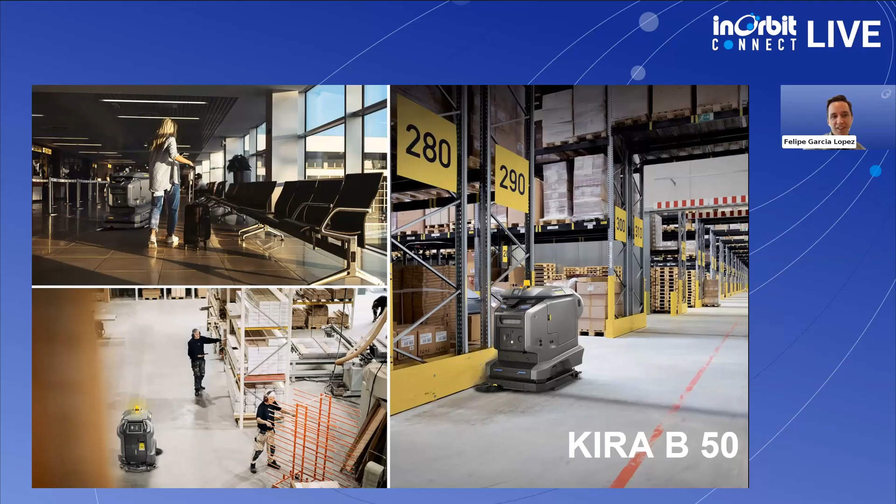To give you a bit of an idea, I hope you can all see the video, so you can see the robot a bit in action.

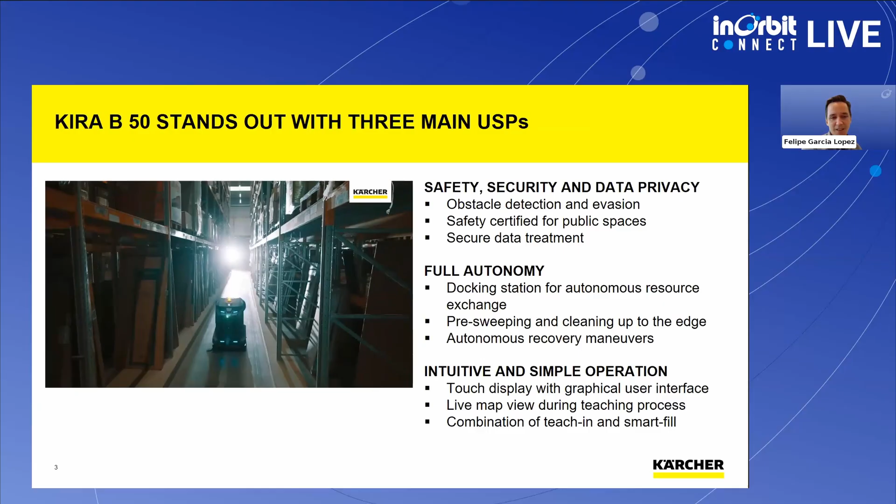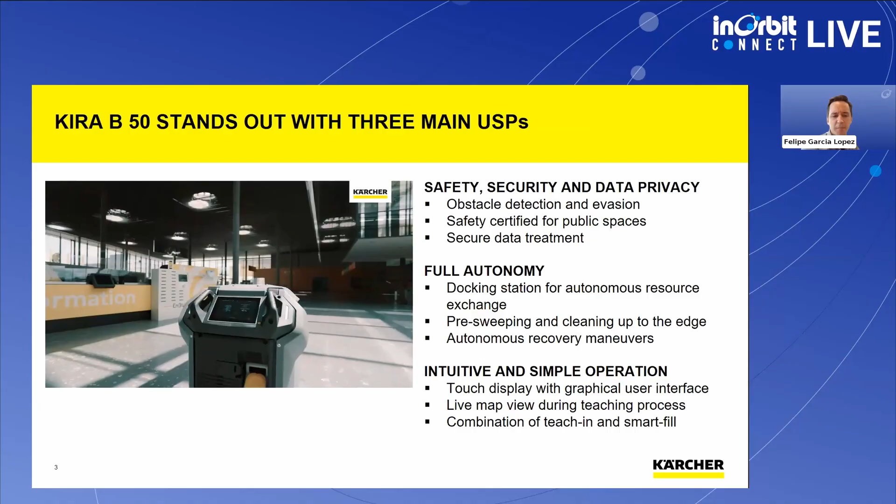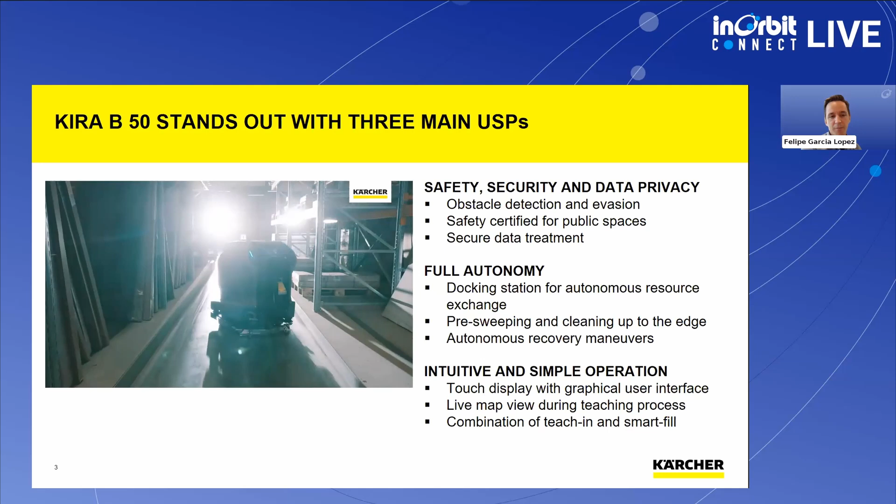The main USPs for this product are that we take a lot of effort having it certified in terms of functional safety and data security and data privacy, because that robot, like most robots, has a lot of sensors. I will show you a bit more details about the sensor setup of that robot later. But for our customers, it's important that the data is secure, that we take care of the environments.

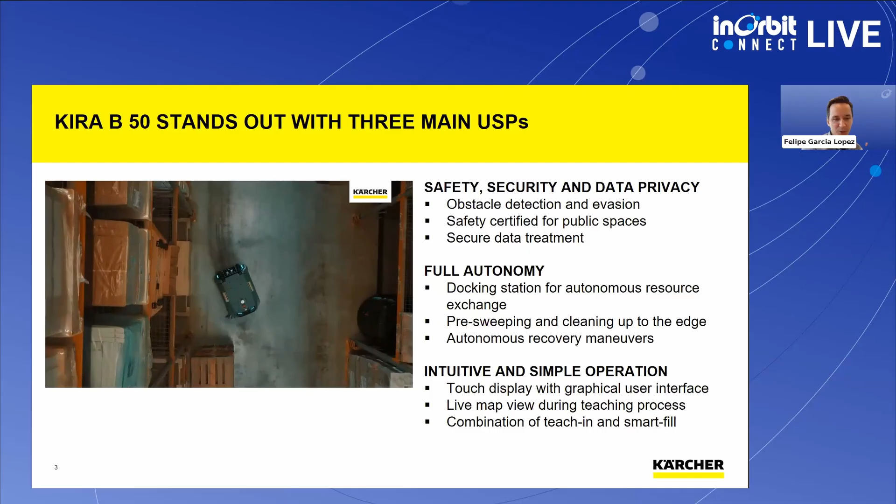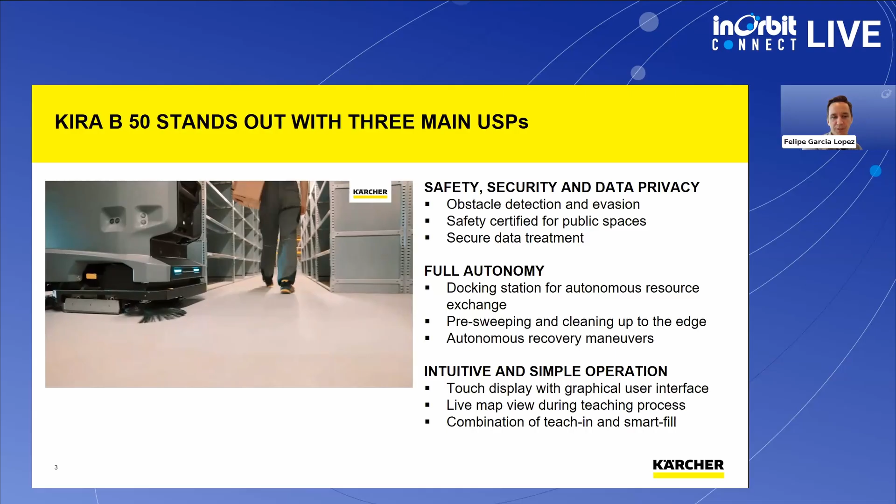And of course, the product itself has a full autonomy promise. We have a docking station, which we'll show you in more detail in the next slide. And it's a very maneuverable robot. We can recover from stuck situations, evade obstacles, and all that, as you can see in this video.

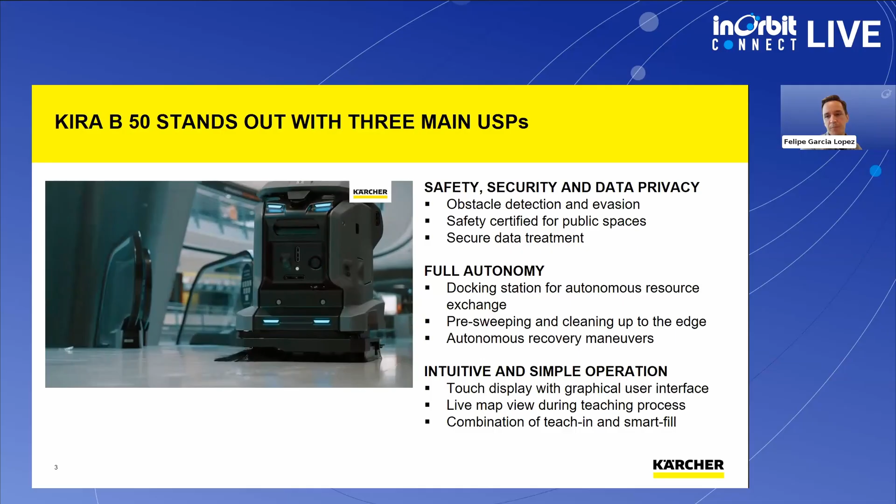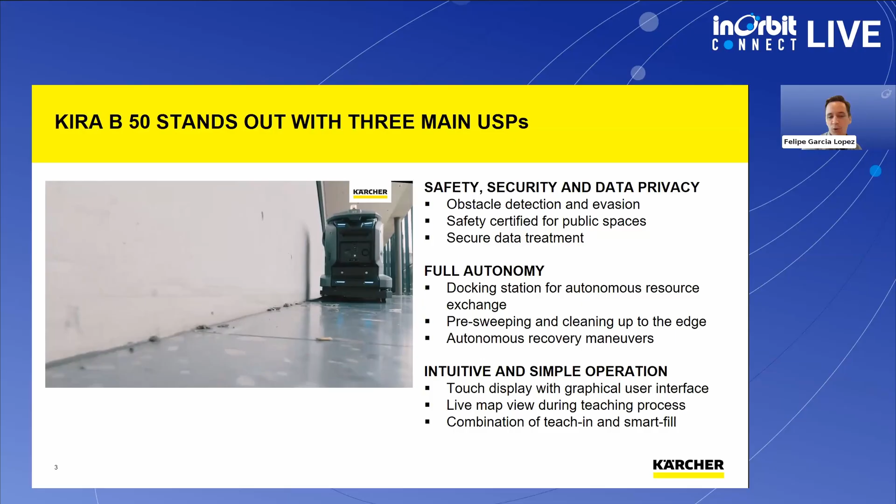And we put a lot of emphasis on easy deployment. So we have a large display on this machine, so everyone can literally use that robot, set up new routes, new missions in their environment. Of course, there are technicians that do setup and training for our customers, but the machine is designed to be very easily used in different environments.

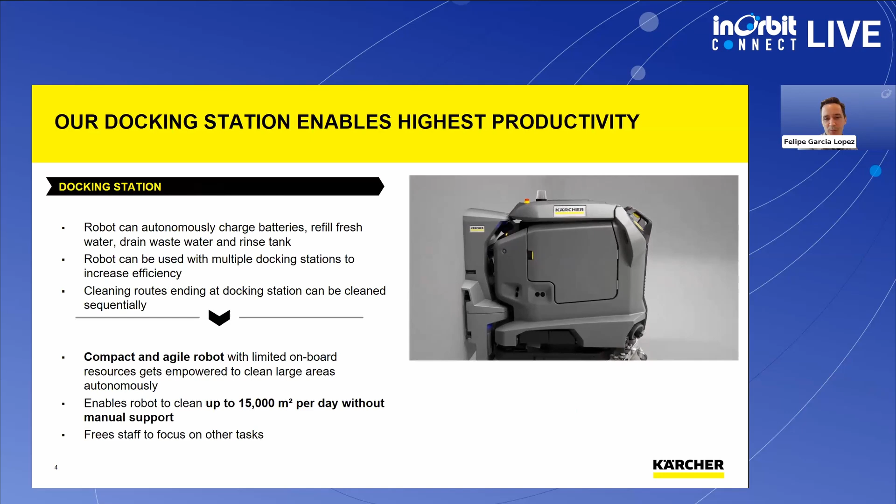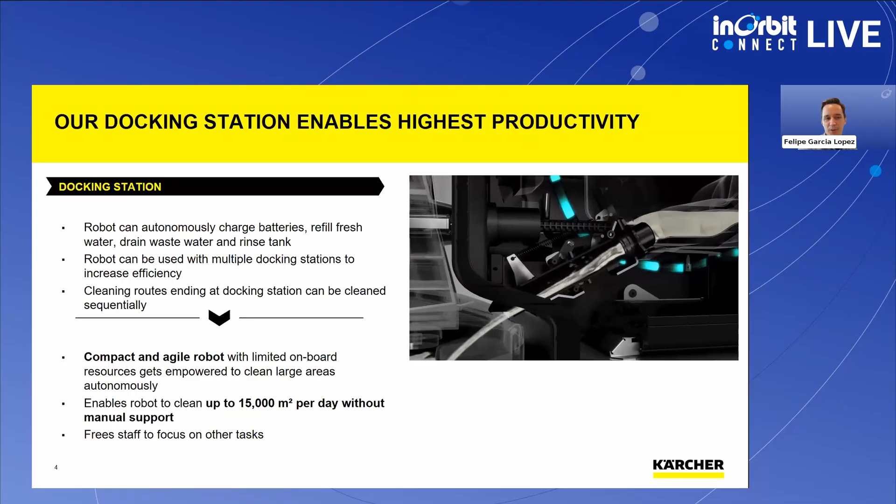As I said, it has a full autonomy promise. This machine comes with a docking station, and not only do we charge batteries, but we also release the dirt water that the scrubber dryer carries, and we do tank rinsing, and of course we also charge fresh water. With that docking station, it's really possible to have that robot running for several days.

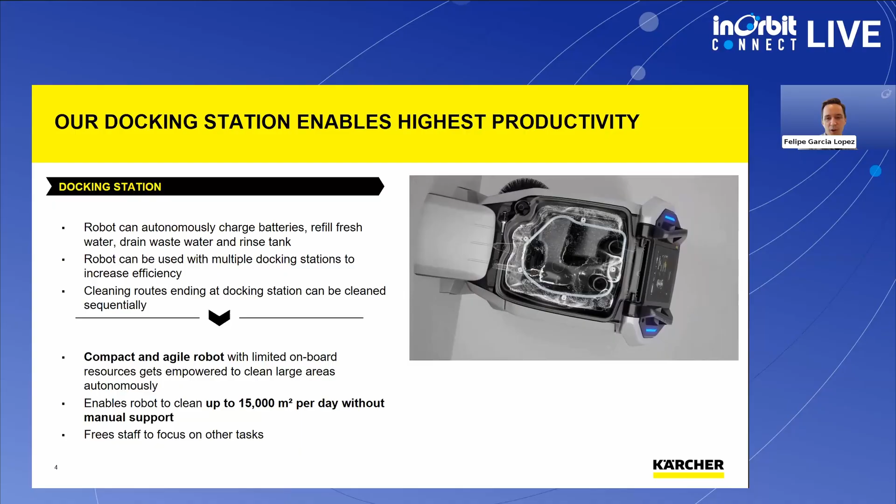Most of our customers use it all week without any human intervention. So the robot does a mission, comes back to the docking station, recharges the resources needed for the very next mission, and then carries on.

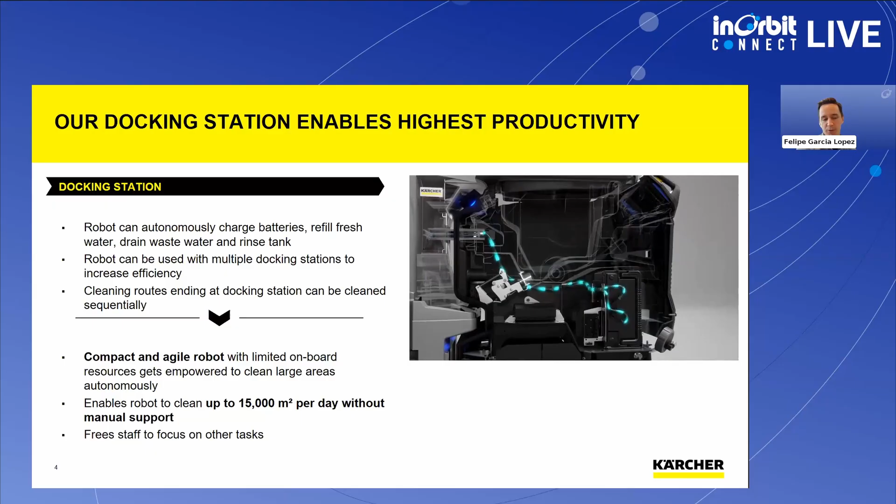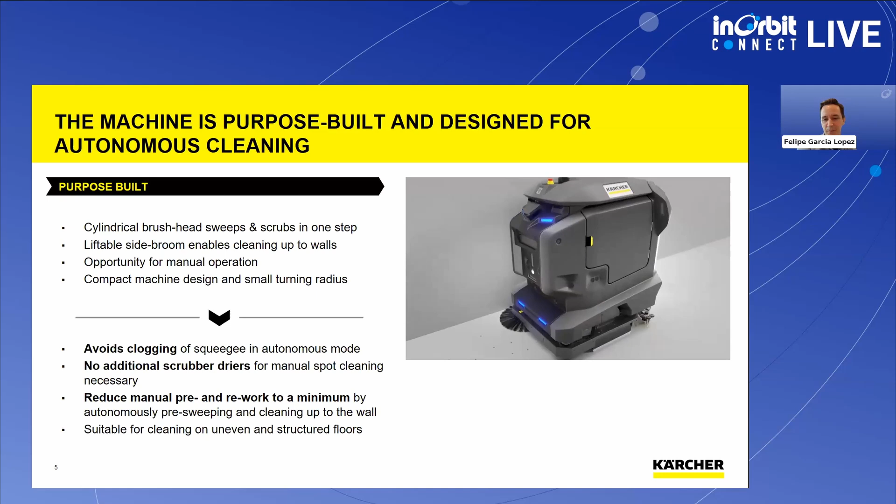In terms of cleaning technology, I'm not sure how interesting this is for this audience, but of course it's a typical Kärcher cleaning tech. We have a pre-sweeping function for coarse dirt, and you can see in this animation how the cleaning technology works. This is special Kärcher technology, but not special for this robot alone. We also have manual machines that have that technology.

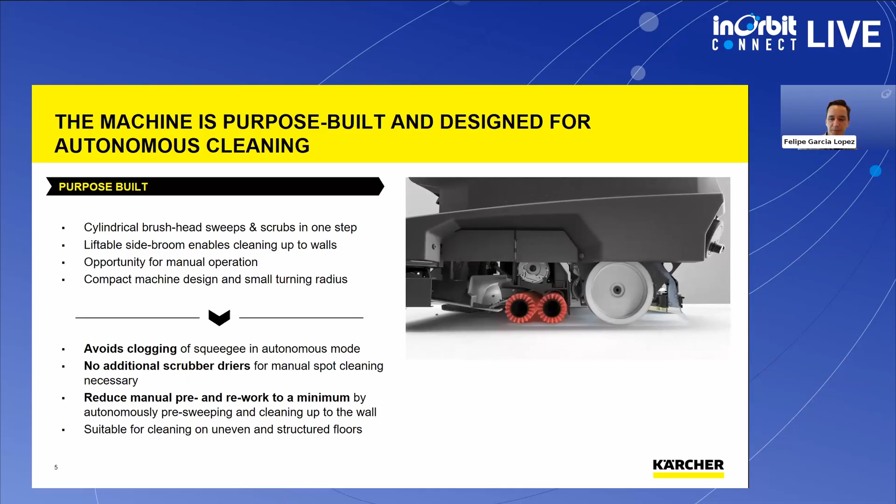I already talked about the certifications that this machine has. We take a lot of effort in certifying the robot to the latest, or the highest, standards in terms of functional safety and data privacy. As I said, this is something that is very important to our company and to our customers.

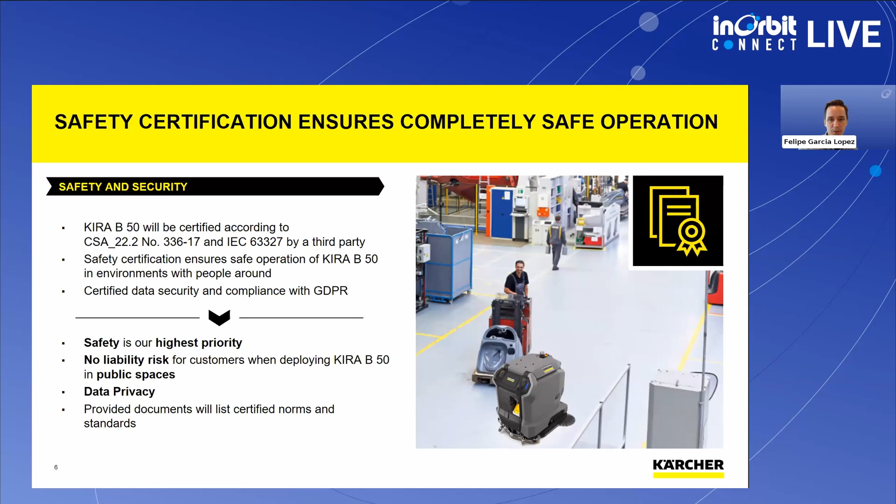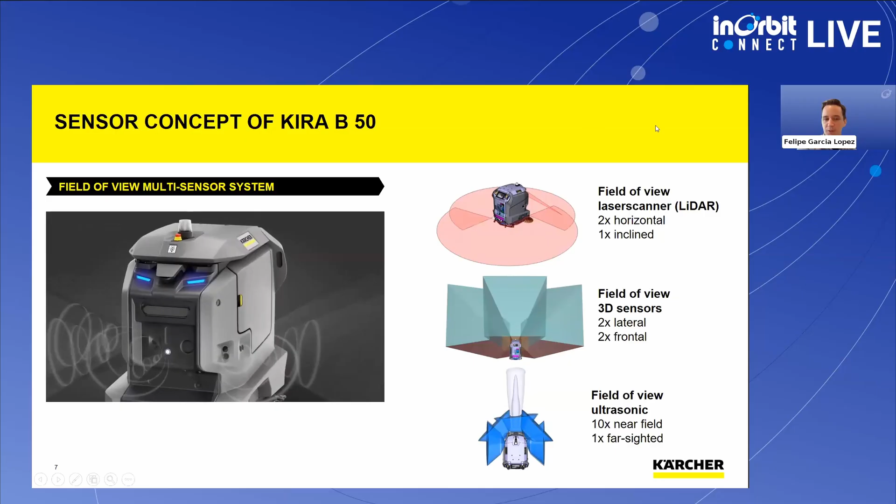In terms of the sensor setup, we use a combination of different sensors. We have LiDAR scanners that do functional safety and part of the mapping and obstacle avoidance. We also have 3D sensors that do obstacle avoidance and perform obstacle mapping. Also equipped, we have ultrasonic sensors for detecting glass, which you find, for example, in shopping malls. For production environments and warehouses, it's not that important, but for retail stores and shopping malls, it's an important feature.

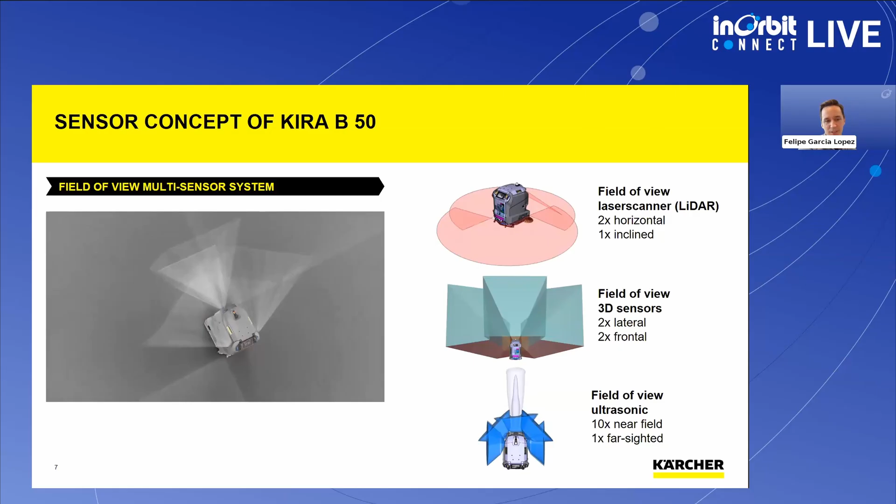In terms of our after-sales success management, we're relying heavily on fleet management based on InOrbit's platform. This is something we established a couple of years ago because we knew we produce these machines, push them out the door, and then our customers need to take care of them. Of course, we have service technicians that can look after these machines, but it was clear for us from the beginning that we have a large fleet of robots in different countries, and it's a complex machine.

There's a high variety of environments that our customers will use that machine in, and we need a lot of data to continuously improve that machine. And that's why we rely on that platform.

We do a lot of performance analysis of our fleet. We also do remote interventions when there's a problem electronically or even in the software from the robots. We can do remote interventions when there's blocked paths or something like that. And of course, we have, if we want to, extensive logs from the machines to do root cause analysis.

And for us, being 12 months plus in the market, this is a game changer, also compared to other products at Kärcher. So we have high transparency on what the robots do, where are difficult situations where we need to improve, for example, our navigation capabilities. We also have a good feeling about the usage of that machine, how often they are used, in what situations, and at what times of day.

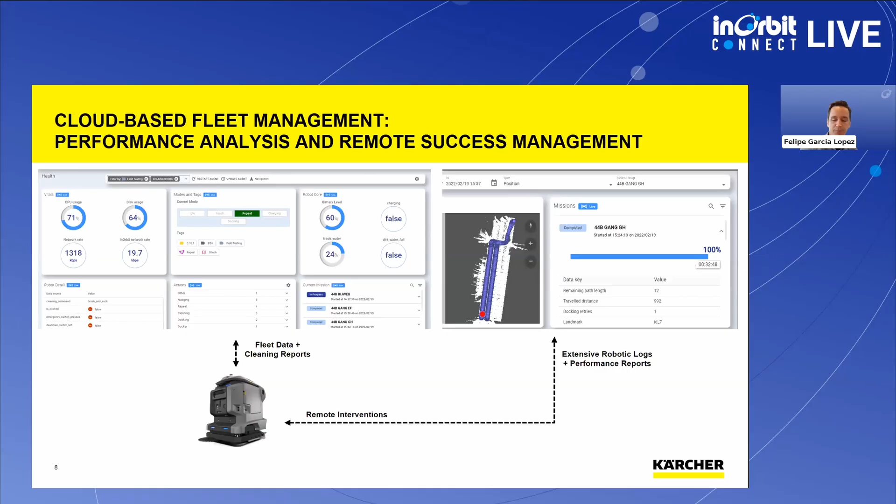This may be an interesting part too. I have videos from our lab here. This is an ever-evolving software that we have. Compared to other products at Kärcher at least, but probably also in other robotics applications, we do regular software updates. We continuously improve the capabilities of our robots. This is just one example, and I think I picked it because it suits the production, warehouse, and supply chain environment where you have a lot of forklifts.

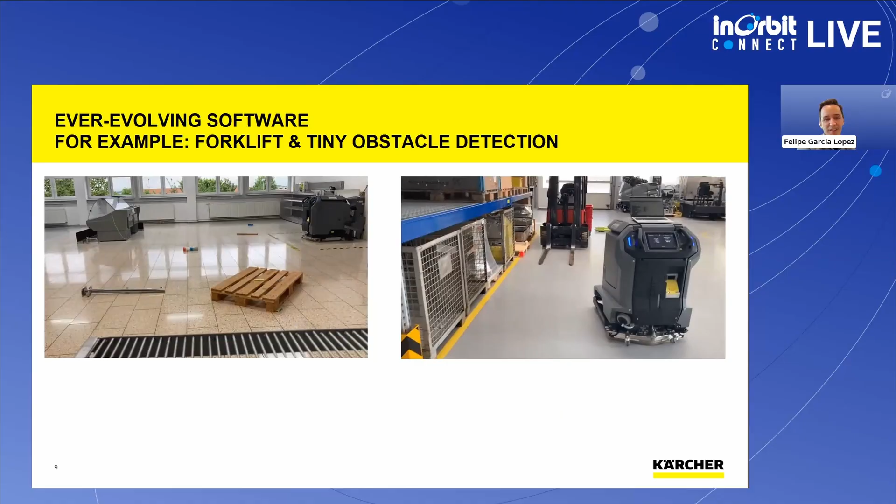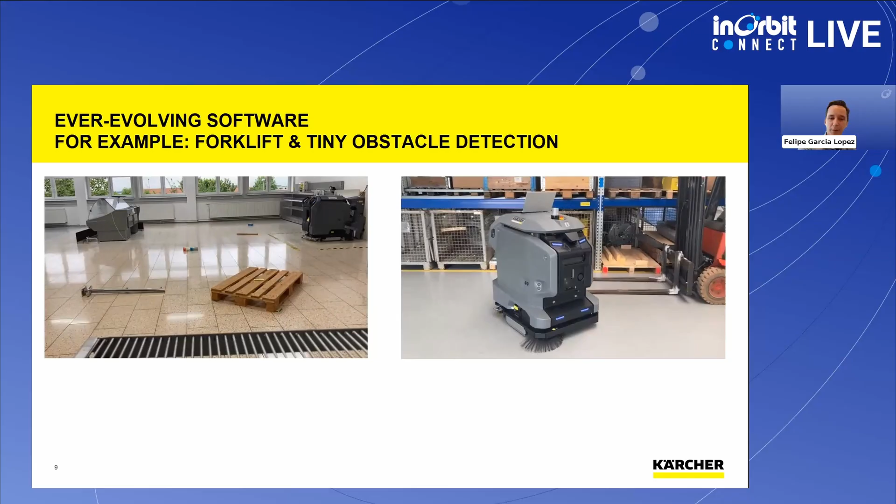When we got in the market, we didn't have any forklift detection, and we got in a lot of trouble because of that. You can tell people to avoid forklifts only for so long. It will happen that the robot encounters forklifts because other than AGVs or AMRs that do transport tasks, we don't have a single route. We want to cover area, so it's a lot harder for us to avoid small obstacles since we want to cover every free space to clean it. This is a good example, based on data we got via InOrbit, of the situations our robots are in. We could improve our software so we can now detect even very small obstacles very well, and this is a software feature we shipped in the spring to our fleet. This is a very good example for the target group we're talking about today.

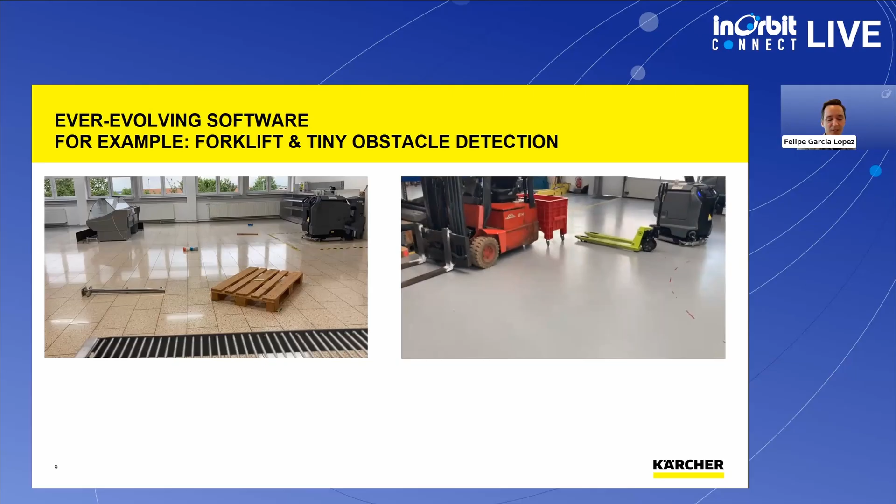That's amazing, Felipe. I think we're cutting into our question time. Do you have one more point you want to make here? Yeah, that's the last slide.

In terms of transparency for our customers, we have a web portal specifically defined for our retail customers. Kira B 50 is also InOrbit Connect certified, as you can see here. So it's also possible for our customers, if they have more than just Kira robots but also other robots in their environment, when they run InOrbit, to link our robot in there as well.

This is also a huge topic lately. I would even say the whole year already for us when we talk to customers is orchestration, or at least connectivity to standard interfaces. For example, VDA 5050 is a huge topic in Europe. But what is meant here is standardized infrastructure and master control for fleets of robots in production environments.

Well, and I guess to that end, we're very familiar with InOrbit Connect. Anyone on the line may not be familiar with that program. We might be able to get into it later today. That is the framing of today's event as well, but we'll certainly get to that as we can.

Just one quick question: can you give some specific examples around orchestration you've encountered with this product? What happens a lot is that we encounter other robots in the environments we're operating, and it's always a problem avoiding collisions with highly dynamic obstacles. We have a lot of crashes with forklift drivers, so that happens a lot. It's also happened once or twice that we had, I wouldn't say collisions, but maybe touching other robots active in the environment. There's always a lot of unnecessary stoppages when you don't have orchestration. Now we have robots in, I'd say, every large logistic or supply chain company already, and they all want some kind of master control interface for these robots. So VDA 5050, as I said, is a topic with every customer, as we experience now.

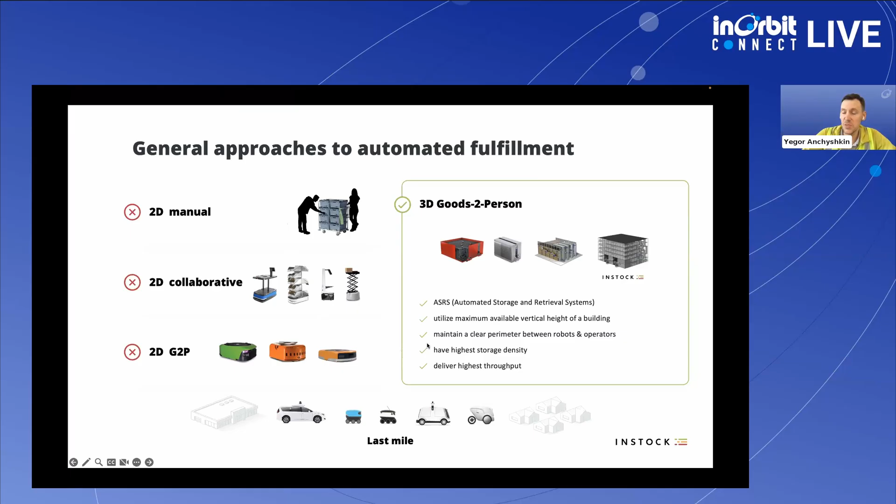Everybody knows that the bedrock of modern e-commerce fulfillment is how you store stuff - storage technology, and how you pick, pack, and ship. The evolution started from manual processes, then pick assist and AMR robots. But the most efficient are goods-to-person robots, which use the full vertical space of your building. The historical problem with this segment was very inflexible solutions, narrow efficiency range, and high cost.

That's where Instock comes in. We spent 14 years in e-commerce fulfillment, delivering for the world's biggest retailers, and had experience working with many solutions. My team, for example, deployed the very first micro-fulfillment site in the world for grocery. So three years ago, we went back to the drawing board, thinking about how to solve some of those challenges, where they're coming from, and what's the root cause.

We came up with a system based on the idea that the root cause of many problems is that the way people address three-dimensional movement was mostly through some kind of gears, pulleys, rails. Those elements require very tight tolerances, and those precision requirements proliferate upstream to manufacturing. Everything becomes more complicated - manufacturing, installation, reinstallation - you need special people, technicians, and manufacturing partners.

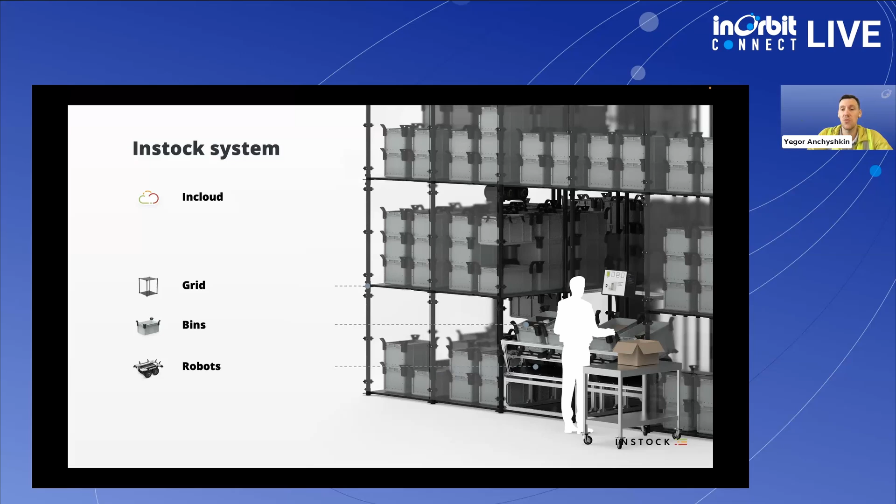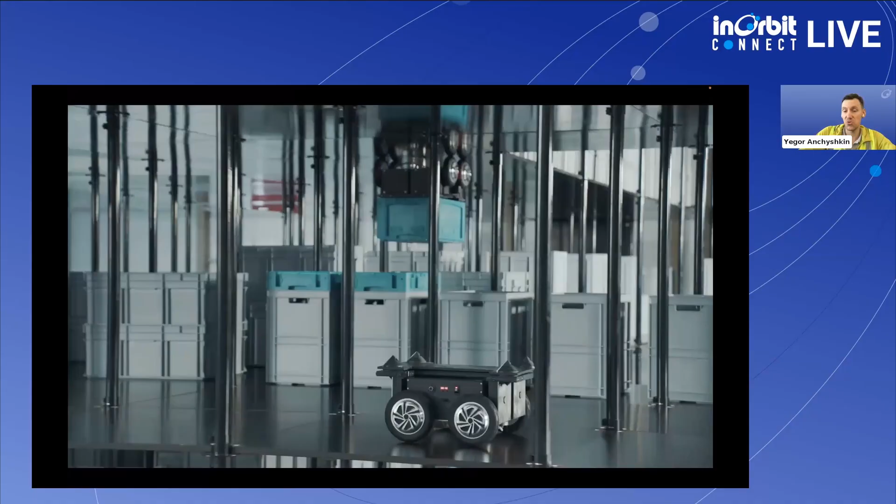That's what we solve. Our grid doesn't require much precision in manufacturing. It's a fully static structure where robots use permanent magnets to drive on floors, walls, and ceilings.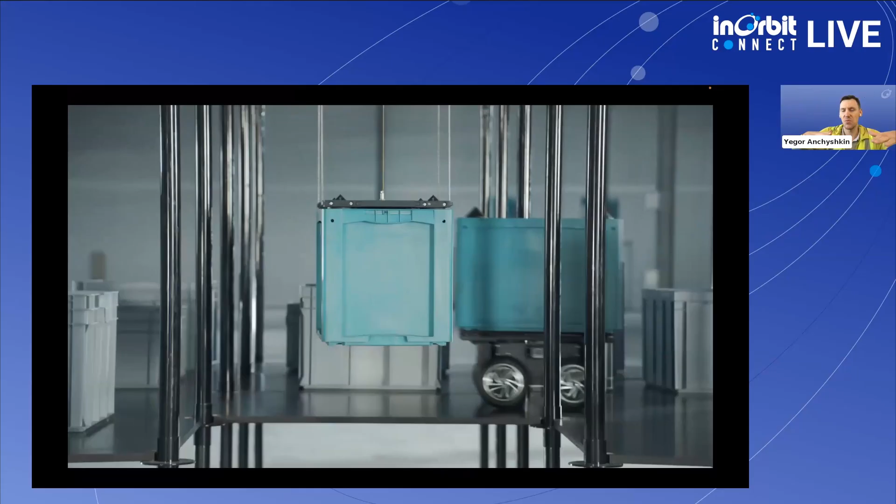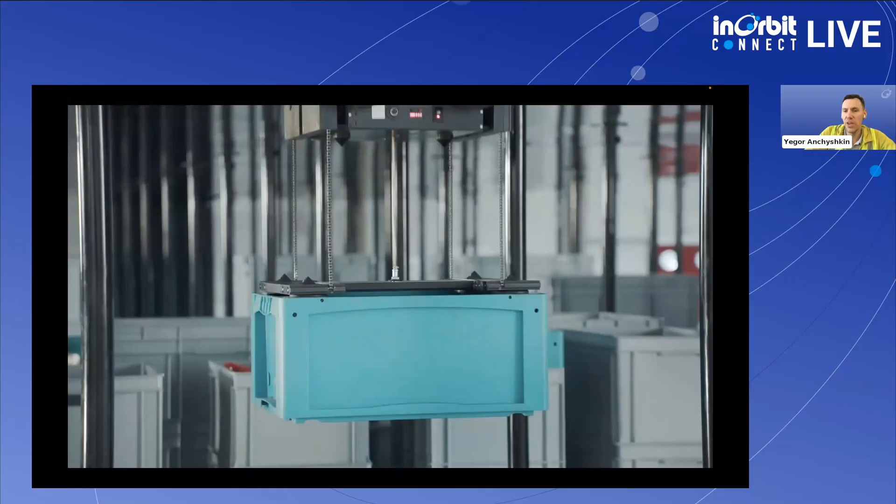Robots drive on those surfaces more like a car driving on a road rather than a train driving on a rail. The dynamic magnetic suspension system of the robot adapts to imperfections of the surface - small ridges, gaps, and steps - so no tight tolerances are required.

That's how we can lower the cost and deliver three-dimensional goods-to-person functionality to customers at a significantly better price point. The major factor behind lowering the price point is reducing the complexity of everything.

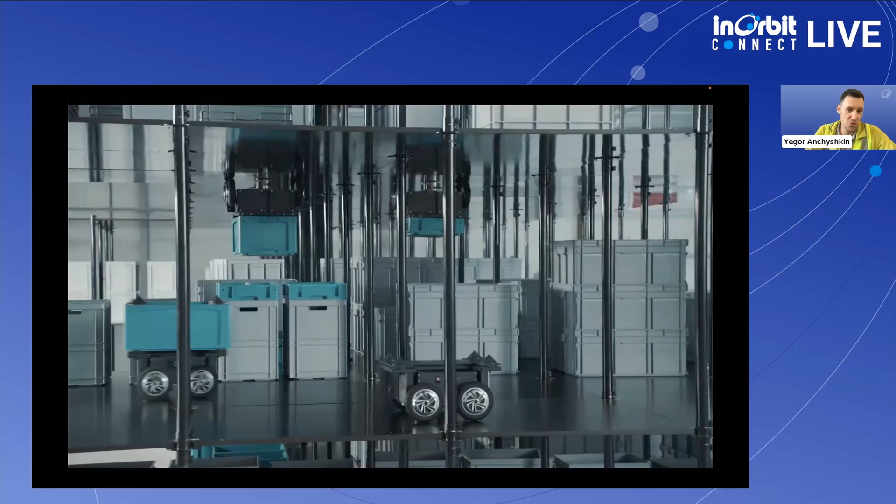Again, due to background noise, I will not go for too long. I wanted to show you the robot, so I have it here right by my side, but I have this background imposed by InOrbit. I don't know, guys, if you can switch it off so I can turn my camera and show the robot, but otherwise I would have to do it from the video presentation. Okay, if you would give me one second, I would launch a demo video.

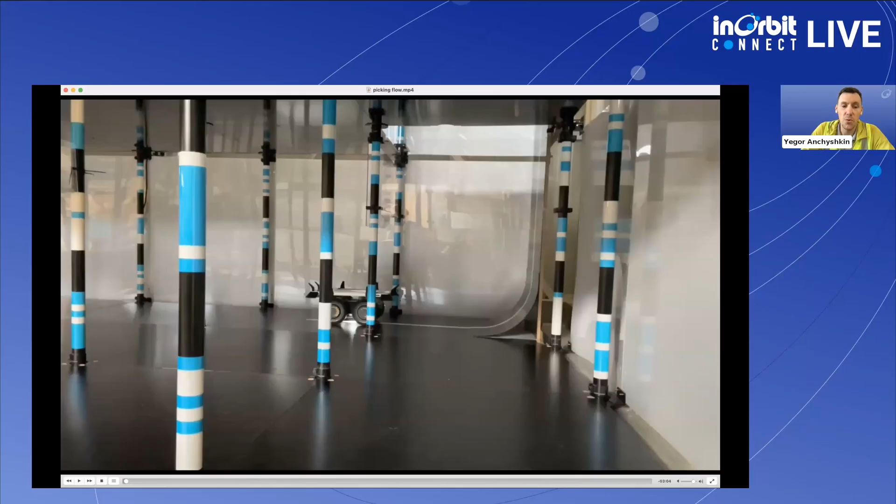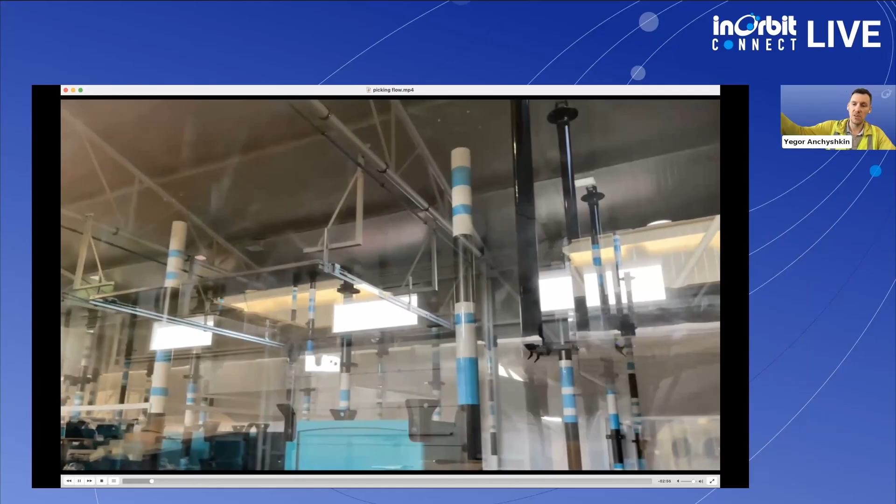This is a video from our QA lab where we test the robots. Here you see the last generation, the one that goes into production. The robot positions itself on top of the bin, picks up a bin, moves it into the bin shaft, and gets bins through the bin shaft to the lower levels.

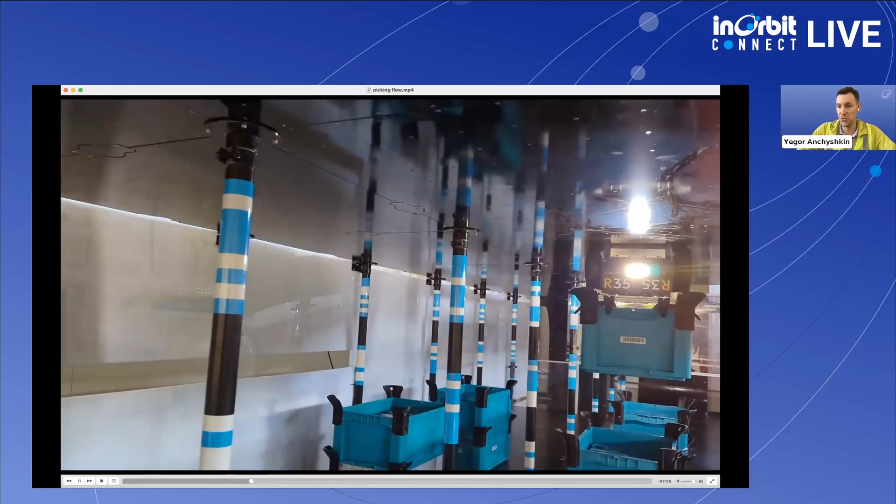The big differentiation between Instock robots and all other solutions like AutoStore, Exotec, and Fabric Robotics is that we have, in our architecture, this big promise of self-service. Our robots weigh only 100 pounds, so our customers can deploy the robots themselves. They can receive, unpack, and let the robots into the grid - everything happens on the ground floor. You don't need any special jigs, tools, or mezzanines to deploy the robot, but they can also send the robot back.

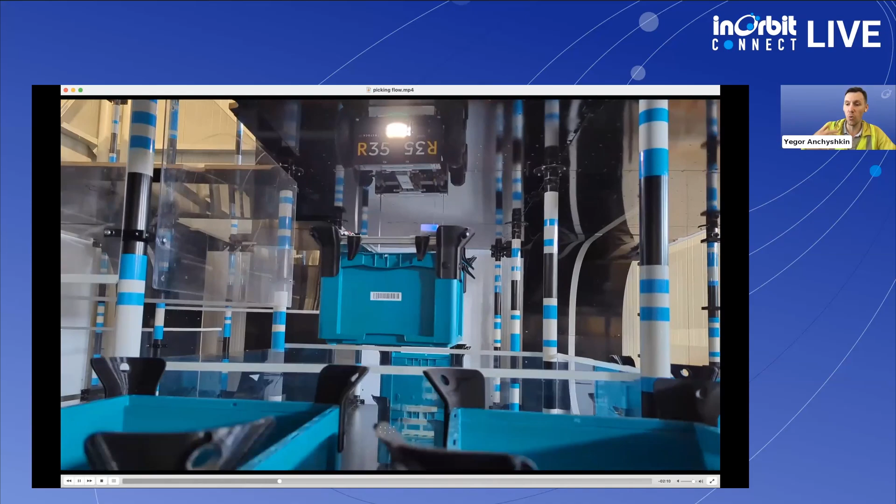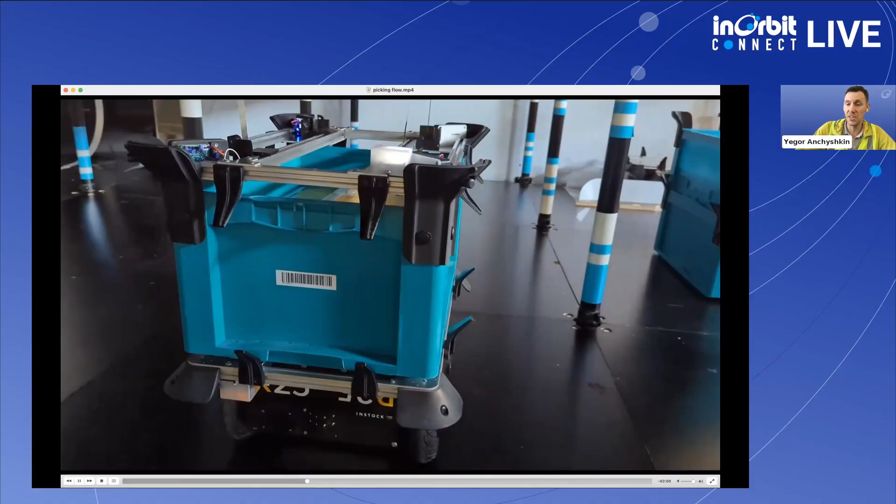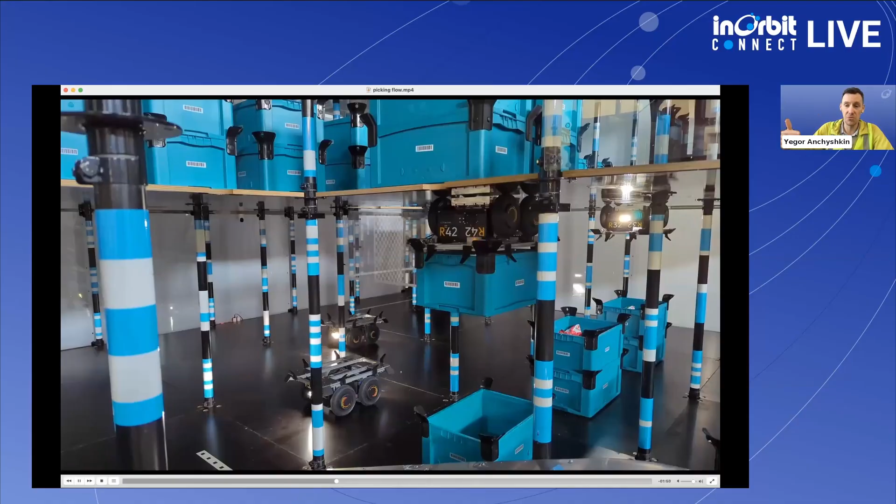That capability of self-service opens up the possibility for an as-a-service model, because now you can share robots between customers. Let's say you anticipate more traffic or more sales next month - some other customer, or we have robots in the Instock depot elsewhere, so those additional robots can be sent to you. You will receive, unpack, and deploy them into the grid yourselves.

Reliability and self-service are two core components we believe are needed to enable very efficient robotics as a service at the right price point. You don't need a technician on site - there are self-service protocols for how you can resolve most situations, and you can scale up or scale down throughput capacity whenever necessary.

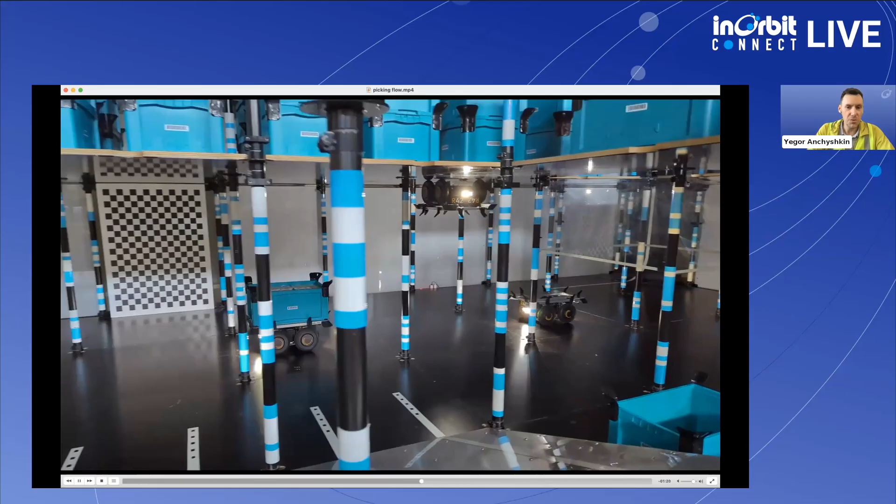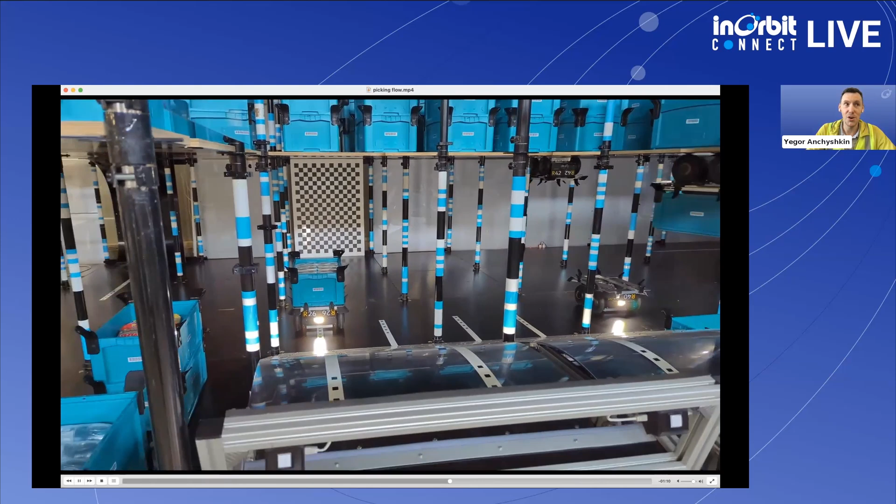So that's Instock in a nutshell. Happy to answer your questions. We're looking forward to the day when we will connect Instock robots to a shared platform, where we can see our robots in conjunction with other robots that may be doing piece picking, for example. We love human associates, but we also anticipate the day where a piece-picking robot will be picking from the bin inside the grid to a bin on some other robot.

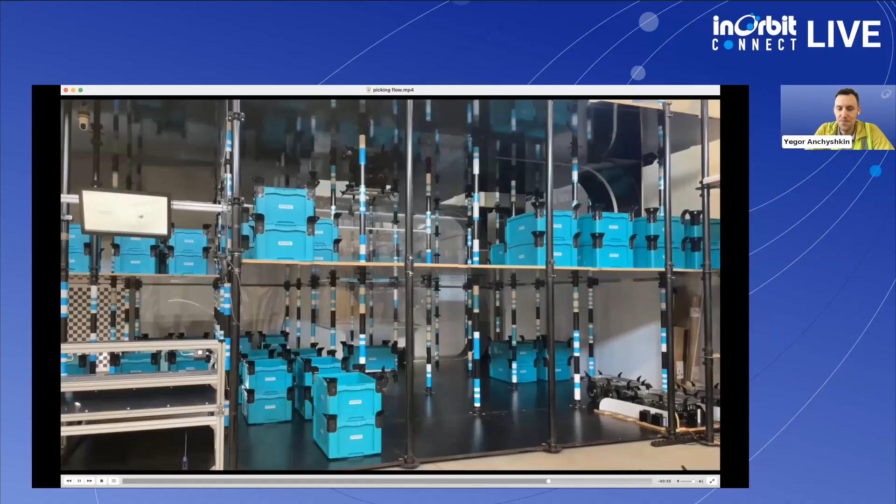Instead of the table you see here, some other robot may have that bin and drive away. And those robots should at least connect to the same interface, the same system to talk to each other. Well, that's sort of the basis of all effective RobOps, right?

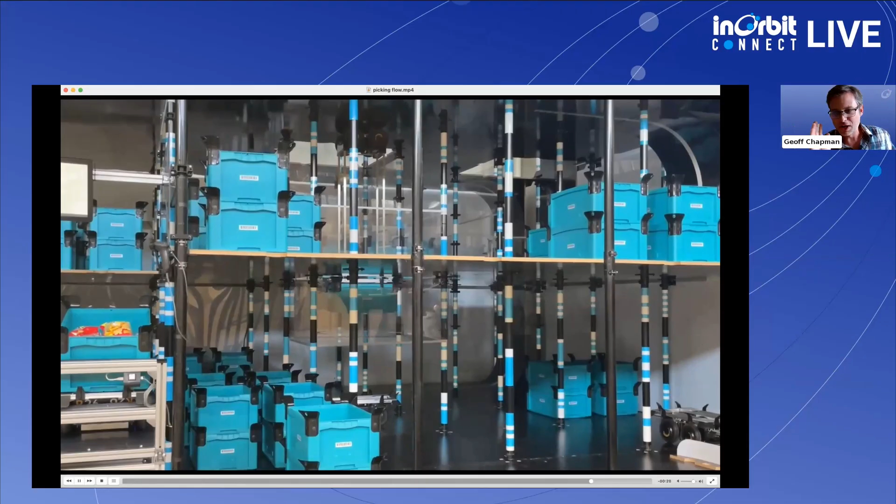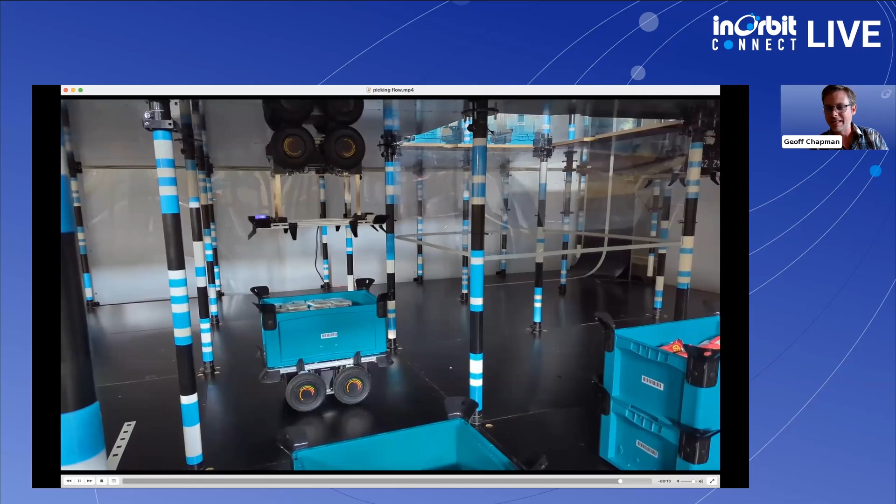Hey Yegor, I had a question for you. By the way, I love this robot, I just can't help watching it go upside down, it's so cool. But let me ask you a question. I think I saw an interview where you said Instock is the most flexible system out there. I think on your website you even call it elastic. Can you talk more about what that means to you guys?

Absolutely. So we decoupled robots from the grid, from the environment, to the maximum possible degree. Everything bolted on the floor is simple, static, and cannot break. The robot is a true AMR—it uses fiducials to localize itself, find its way to the charging stations, and if necessary, even come to the exit of the grid. We're the only company where the robot driving space and the storage positions of bins are the same space. We don't have predefined storage positions. We can optimize storage-to-throughput ratio because it's the same space, and these two parameters are always in counterbalance—the more space you take for storing stuff, the less space you have for driving. So we can balance these parameters even post-installation, which other companies cannot do. So this flexibility—simple static infrastructure, an AMR robot customers can deploy themselves, and the ability to tune parameters post-installation—that's what brings flexibility.

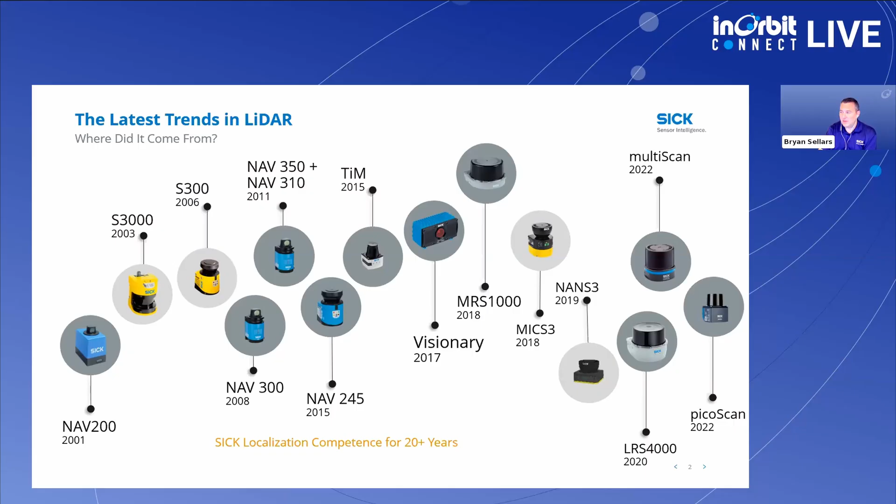So where did we all start? We started about 20-something years ago with this very simple rotary LiDAR, and since then you can kind of see the progression over the last couple of decades—different shapes, different sizes, different features, human-rated safety LiDAR, multi-layer LiDAR, and everything like that. So you get an idea that we've been doing this for a minute. And of course we've always been in the industrial area—we're not into the automotive sector, not trying to get into the self-driving car market, really just staying in the manufacturing, industrial side.

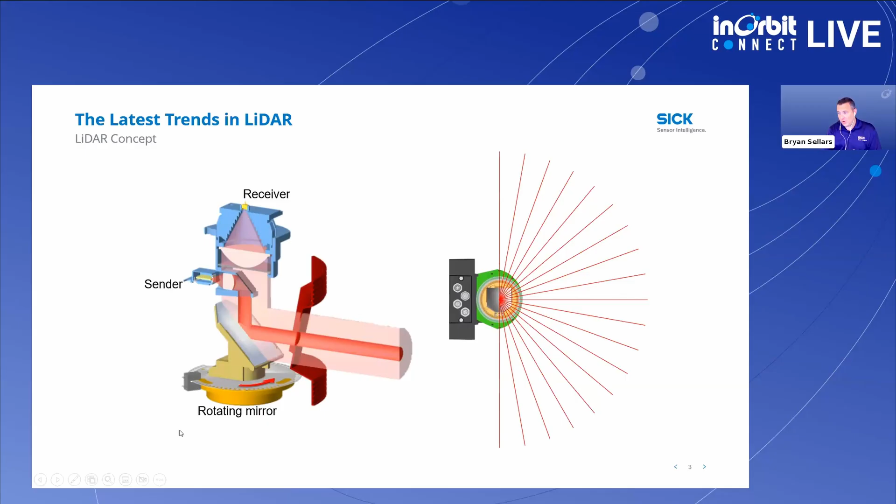So for those who may not be familiar with how LiDAR works, here's a brief little animation for you. We're using time-of-flight laser, which basically says: okay, how long does it take to get from the sender to the target and back? We're using that technology in correlation with a rotating mirror. Whether it's 180 degrees like this is showing, whether it's 270 or even 360, it's all the same type of format—you're sweeping these lasers around, and using that to build the area that you're looking into.

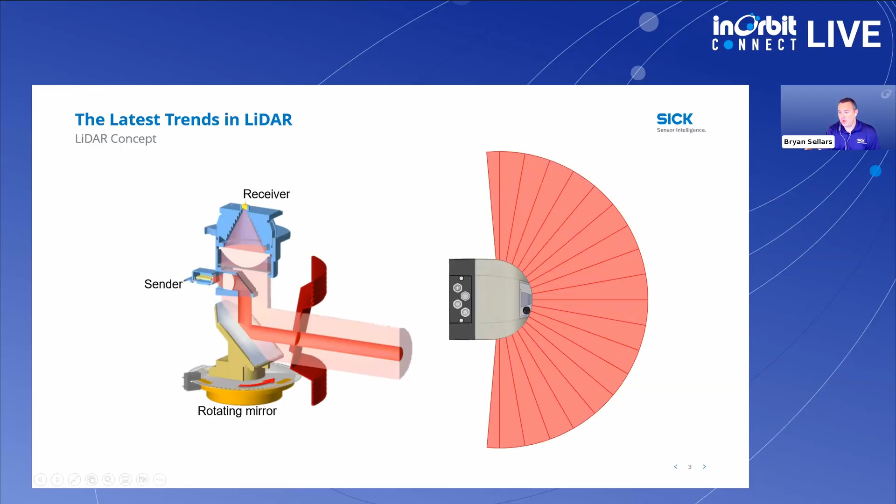From that, there's always been the idea of having a moving target, a moving product inside of the LiDAR. Anytime you have something moving, mechanical movement causes heat, and heat makes products break down over time. So the next holy grail, if you want to call it that, is this idea of solid state.

Solid state being there's no moving parts, you're just using pixels. This also gives you a 3D type of field of view. So you can see there on the left, this SICK Visionary T is using an array of pixels. You're looking in the X and Y direction, but also in the Z direction, forward and backward and towards the LiDAR unit, so you can see that 3D section.

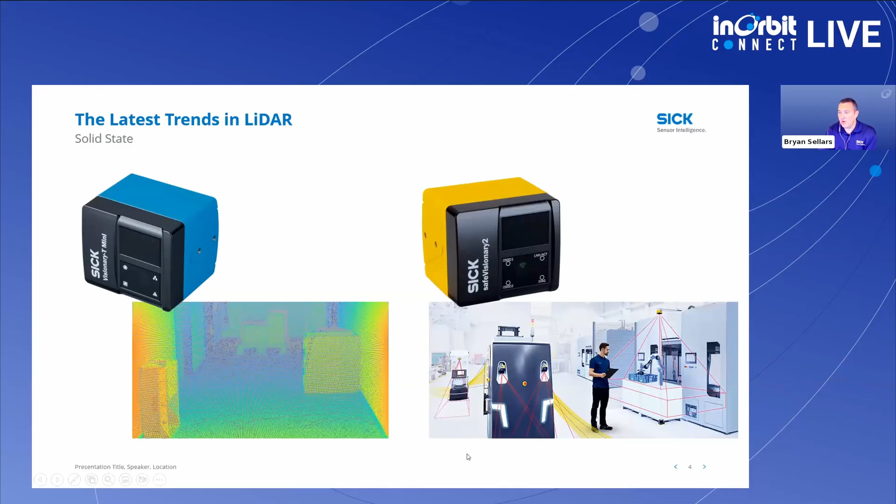Now, the latest advancement is actually making these human safety rated. So we can use these on AMRs, AGVs, and also in industrial robot cells, to put a 3D cone, if you will, over the robot cell, which is a new feature.

So what is this data doing? Obviously the LiDAR can use the sensor data just to measure its environment. It can also do localization, where you're comparing the measured data with a map that's already been preloaded into the bot, and then you can determine position based on those measurements. And then, of course, navigation. The LiDAR is one of the main ways to tell the bot where to go, what not to hit, whether it be a person or a column.

Getting back to localization, that's not new. LiDAR localization has been around for a long time. It has traditionally used what I would call reflectors, something that you put into the environment. And as long as you get three reflectors, you've got the means to do triangulation, and so the bot knows where it's at.

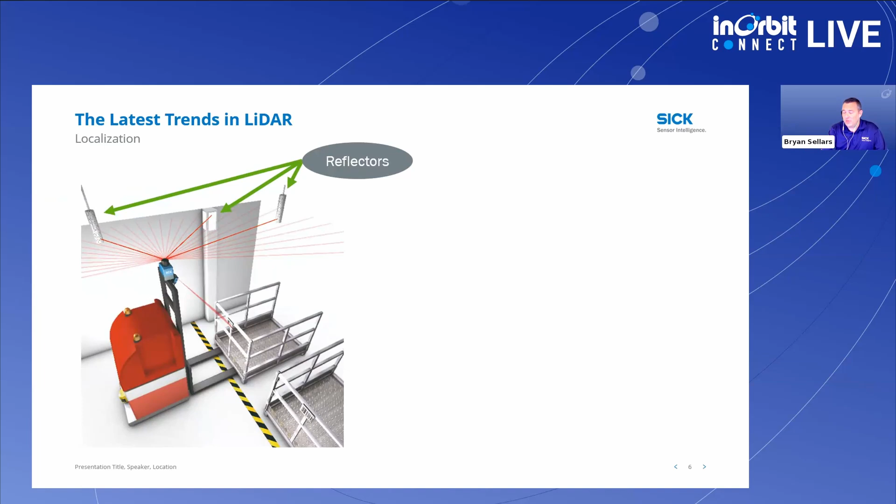Well, that's morphed into being able to just use natural contours in the environment, not having to depend on additional items that you as a customer, OEM, or integrator have to add into the environment in order to localize. Now you can just use contours that are out there, shelves, columns, pallets, whatever it may be. The nice thing is if you ever have to move something like a shelf or a column, it's not a big deal. You can just reteach its environment, and it'll pick up as normal, just as if it was working before.

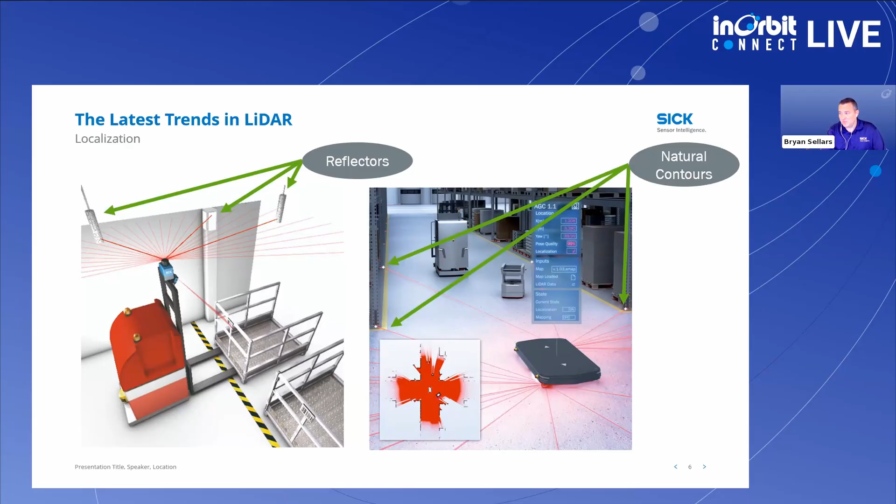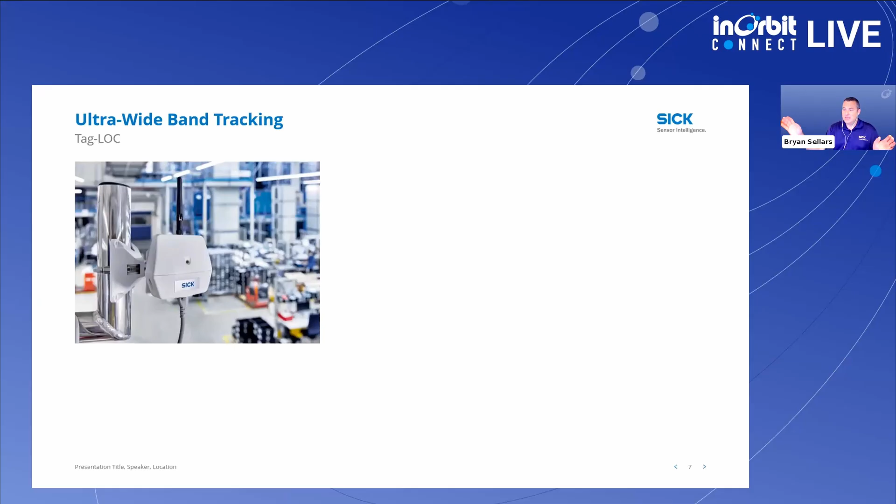So you move from LiDAR, now we're moving into the next phase, which is ultra wideband. Again, it's not really new, but in the industrial area it's kind of new. Imagine taking a bunch of anchors that you're putting into the environment, and then you've got these tags that do the localization for you.

The tags could be on the bots themselves, they could be on the assets, or they could be on things like a little tote or something like that. So you can actually not only track the bots, but you can also track the totes themselves.

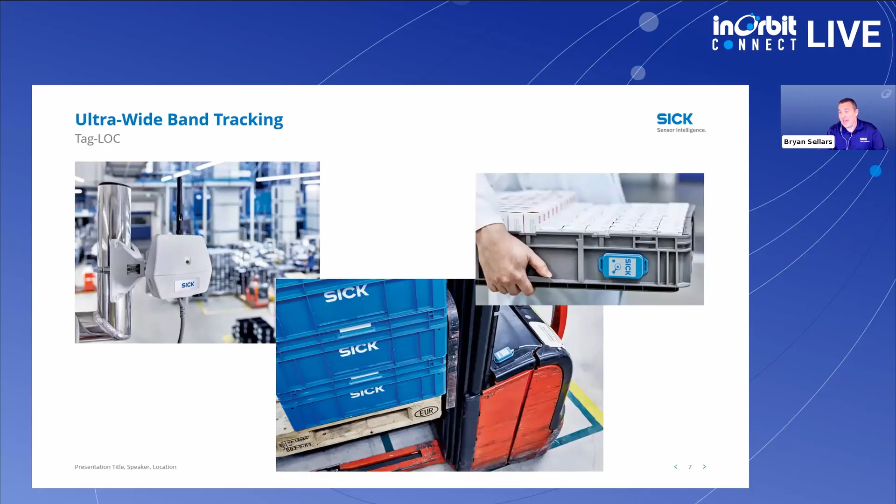The nice thing about this is line of sight isn't as crucial, because you're putting out those waves. LiDAR can't look around the corner because you're using laser light. This is not as susceptible to that because you've got the tags everywhere and they're always going to pick up. So you're taking that tracking off of the bot itself and putting it into the environment, with the tags just being on the bot or the assets.

From there, where that object is, you can use that data to understand the flow of goods, and then start trying to optimize that. Now you're getting into the Industry 4.0 level, which is still, I'd say, in its infancy. We've been touting it for a while, but analyzing that data, taking the big data and doing something with it, is the heart of Industry 4.0. That's what we're really trying to get out of this type of stuff. So that's really all I had for you today.

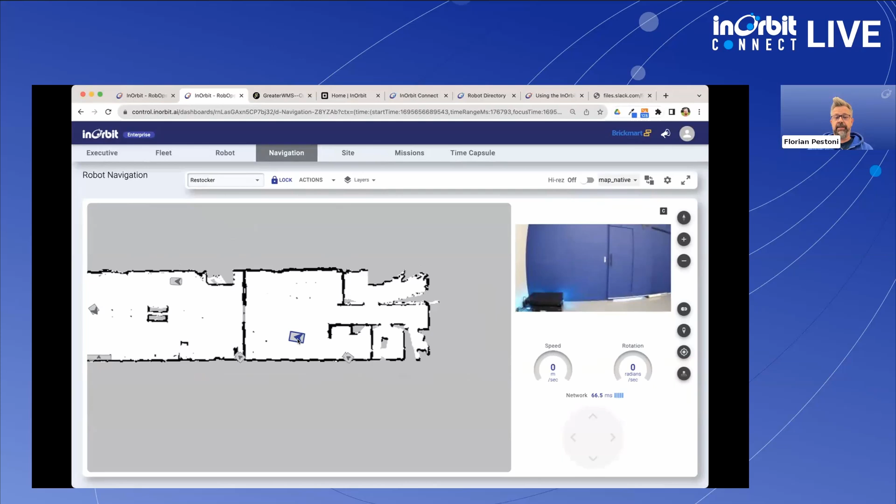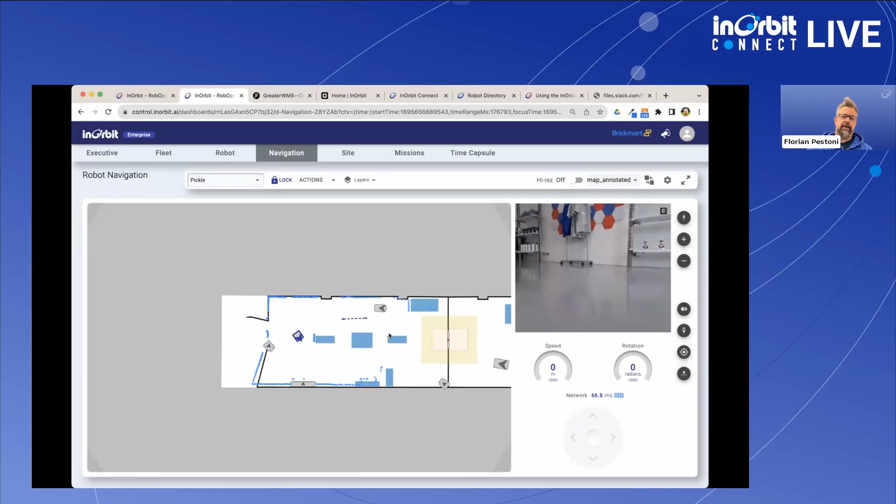One of the things we're able to do is put multiple robots basically on the same map. Of course, each robot will build its own version of the map, very much in line with what Bryan was discussing. So this is how this MiR100 sees the world with its unique sensor package. If I switch to an OTTO 100, it's the same space, but it will see it a little differently. We have our little picking robot here, and it has its own view. But these maps aren't the most human-friendly, so we like to use an annotated map that's easier to understand.

You can see we're getting a lot of data, like the LiDAR return and camera view. Rather than go into the details of this, let's take a step back.

It goes through a warehouse management system. Of course, there's a number of WMS systems out there, we're just using one for our purposes. So that order is now being picked up by InOrbit. And what we're going to see, if I'm not too fast, we'll miss it, is we see the robot moving towards that location.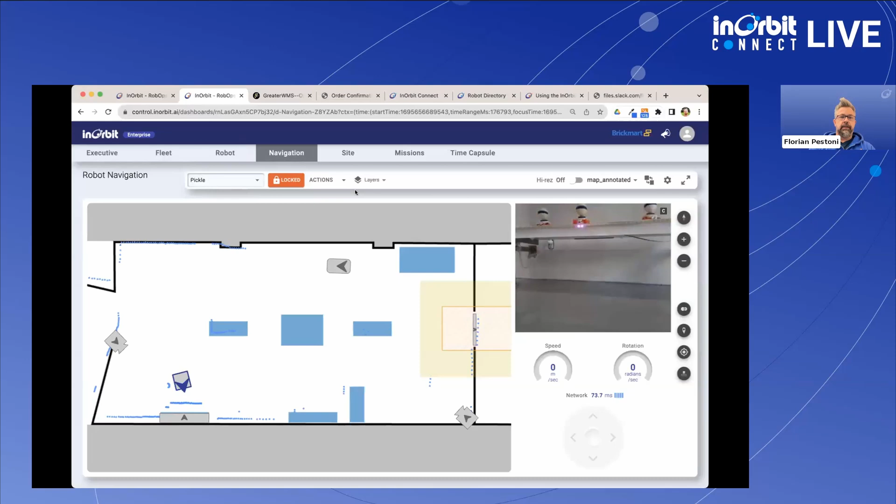Let me give you a better view here, before our helpful warehouse associate fulfills the order. You can see there's a pick-to-light system as well. He's using InOrbit on his phone to indicate that the order is complete. And you can see the robot is waiting for an item, and now it's moving on towards its destination.

So we just saw a classic case of picking, where it's a collaborative effort between an associate and the robot. Now, you may have noticed that we were out of hoodies, so our system also dispatched a restocking robot.

Here's the restocker next to me trying to go through the door. We also control the door. But check this out, we had both robots trying to go through the door at once. That would have been a disaster, right? So InOrbit can basically do traffic management across brands. In this case, it was an intersection or a door, so it paused one of the robots while the other continued.

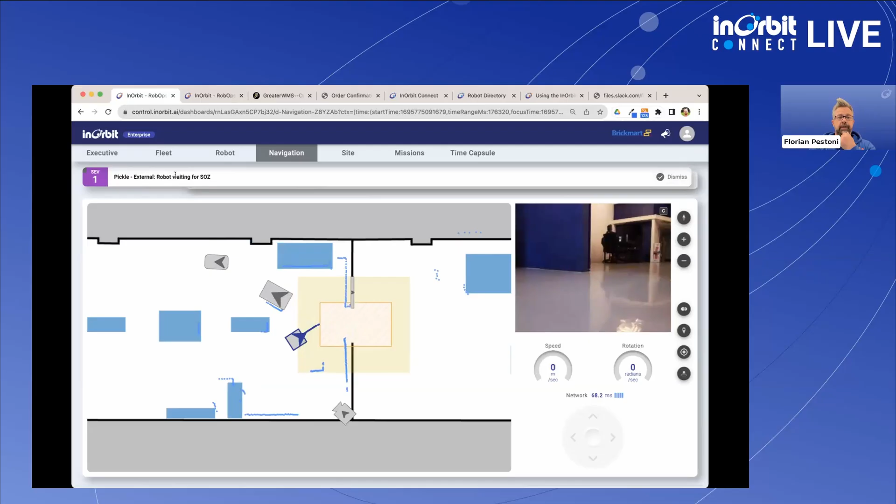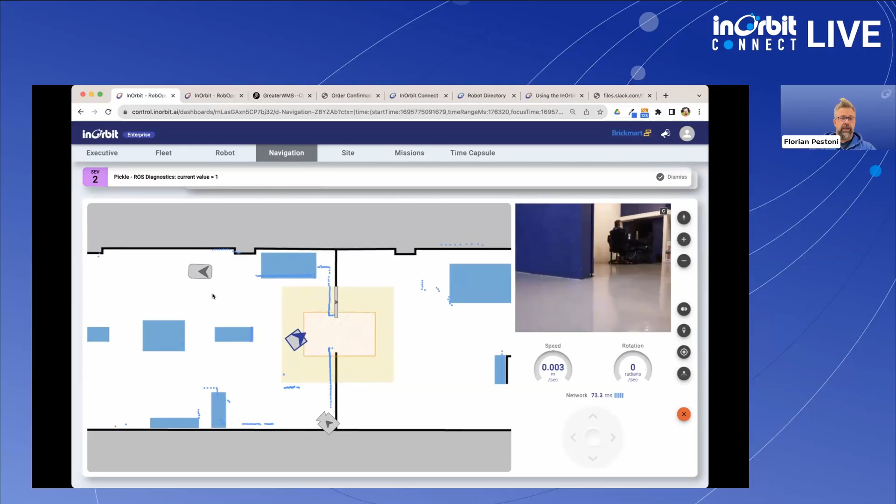You can see the robot is waiting for the single occupancy zone to be ready. Once that area is clear, this robot continues towards the back where the items will be picked. I think what's interesting here is we had integrations with IoT devices like a door, integrations with cameras, and integrations between different robots.

And now when the robot arrives at its restocking location, you can see the pick-to-light here. That shelf is glowing orange because it needs some hoodies. Now Chris will fulfill that, going to the tablet mounted on the robot and basically saying, great, we've completed that order.

So again, the robots continue through their tasks. How are these tasks defined? Let's talk about missions. Missions are a way to define the robot behavior.

And of course, we can integrate with its native fleet manager, but also we can define missions that are generic. The benefit of that is now you can see the performance of all the robots across all of these different missions. And oh, there's an alert here.

It looks like the waypoint is blocked. So one of the things you need to do is problem resolution. Let's see what's going on. You can see the robot is trying to get there. Let's see. Okay, looks like there's something blocking the way.

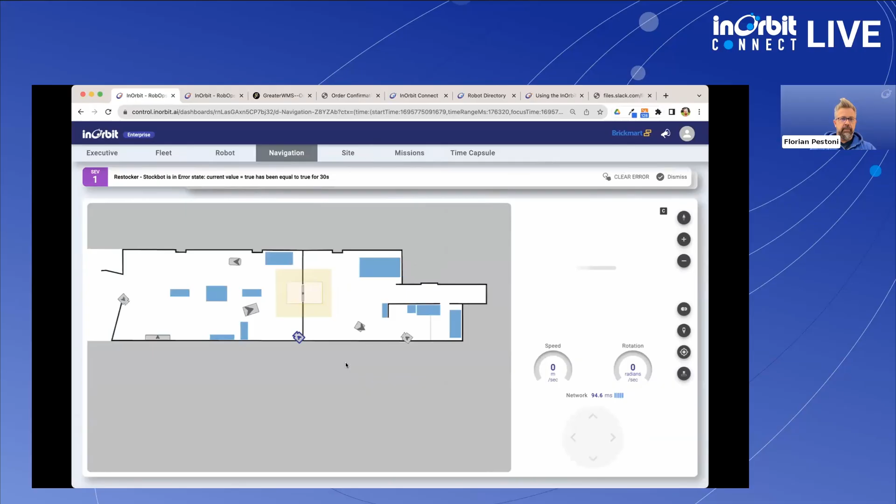Let me just pick this camera. Yeah, it looks like somebody left a pallet there. I really wish we had that ultra wideband tags from SIG already installed, because then we'd be able to know that something is there. But in the meantime, let me try and fix that.

So in this case, I'm going to connect to our MiR 100 and tell it to go return the cart. Just to be clear, I'm not controlling the robot. I'm basically nudging the robot to do the right thing. In this case, this is using MiR's native fleet manager and navigation.

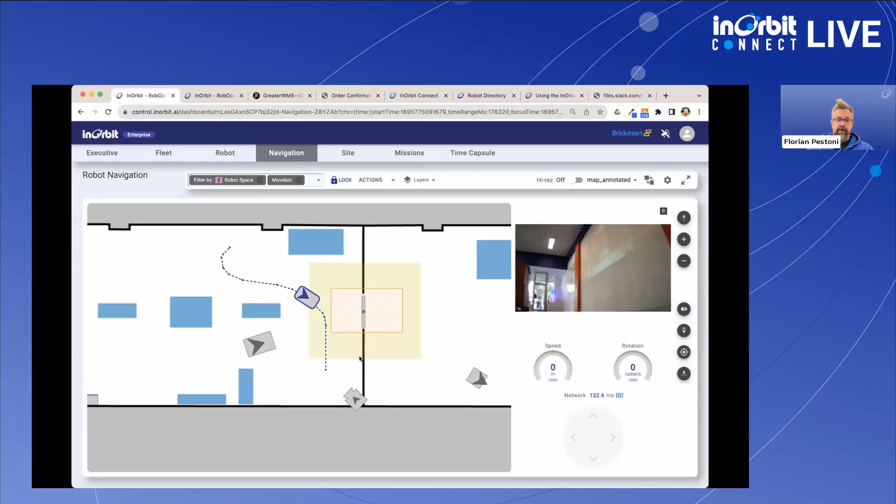And it's going to go towards, let me see, here's a better view. It's going to go pick up that cart, that pallet loaded with boxes. And I'm going to wait until basically the coast is clear and it's safe for the MiR 100, our restocker robot, to continue. So as soon as this moves out of the way...

I think it's thinking how to get out of there. There we go. So as soon as this is out of the way, I can do, and I'm going to do it here from the UI so you can actually see it, but I'm actually getting alerts on my phone via Slack. So I could resolve the problem directly from Slack.

But here you'll be able to see it. I'm going to clear the error that this robot has. And then let me, yeah, there. So let me retry that mission. And there we go. So the robot got to its destination.

So I think maybe just as a quick recap, we were able to see some missions in real life. We were able to see things as they were happening, but maybe I want to go back in time to a few days ago and then look at a mission that was carried out by a robot. Because InOrbit is recording everything that's going on, we can now go back to a previous mission from days ago. We can see all the data about the robot, all the incidents, everything is correlated, of course.

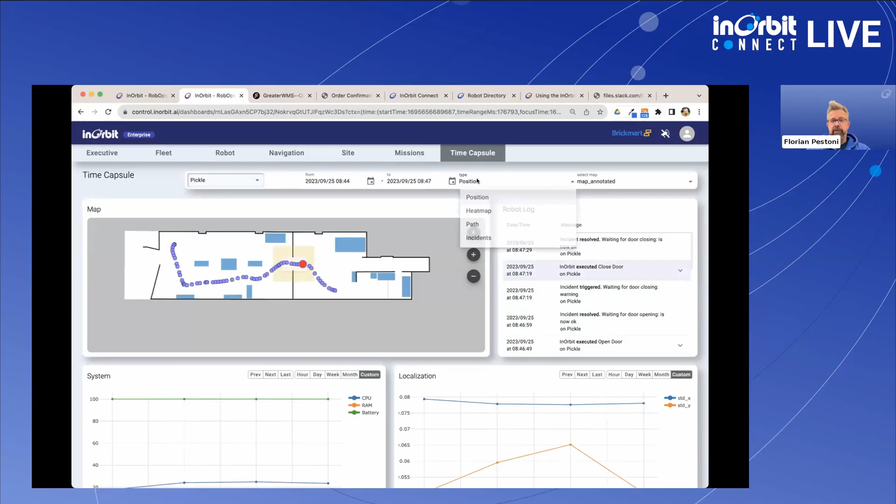And then I love looking at the heat map, which shows me where the robot is spending its time. And one thing I can see here is there's this extra stop here. I don't know, like this is the shelf, this is the door, all of this makes sense. But I may want to go back and investigate why the robot was spending time here, because that might be an inefficiency, and then that allows me to continuously improve the operations.

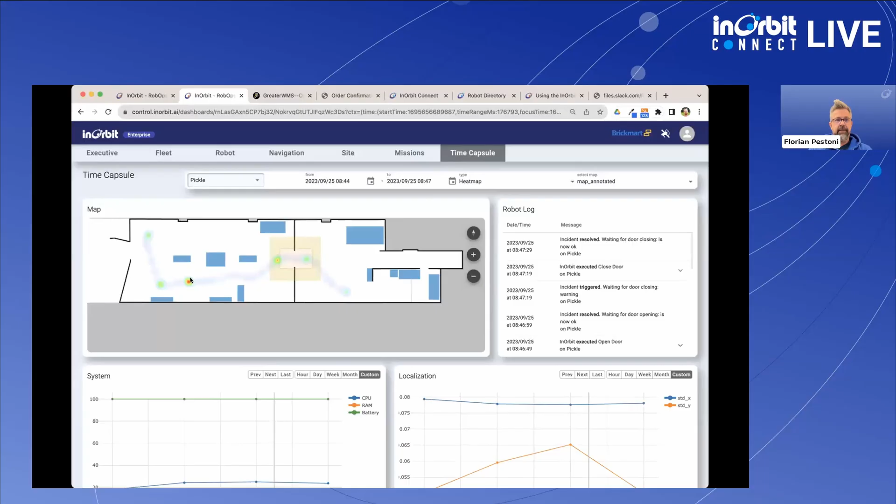So to recap, we saw content from all of these interactions with all of these different robots all working together.

Yeah, that was great, Florian. I obviously think it's amazing. It's really cool to see these different robots from different vendors working together. I think that people who are just getting into this sort of space, there's a lot of concern about how to approach RobOps and orchestration of various robots. When you get into a production setting, you start small, but very quickly, once you start seeing success, our experience with all of our customers has really been, you start seeing success and immediately you're like, well, if my robots are working well picking, why wouldn't I add a floor cleaning robot? Of course, that just makes sense.

So can you talk maybe a bit about InOrbit's approach to interoperability and how we manage that? Yeah, of course. So there's all of these different use cases that could be automated. We saw even today, we saw the amazing work from Instock, but once that bin comes out, where does it go? There may be an AMR waiting for it. And then you need to keep that warehouse clean, right?